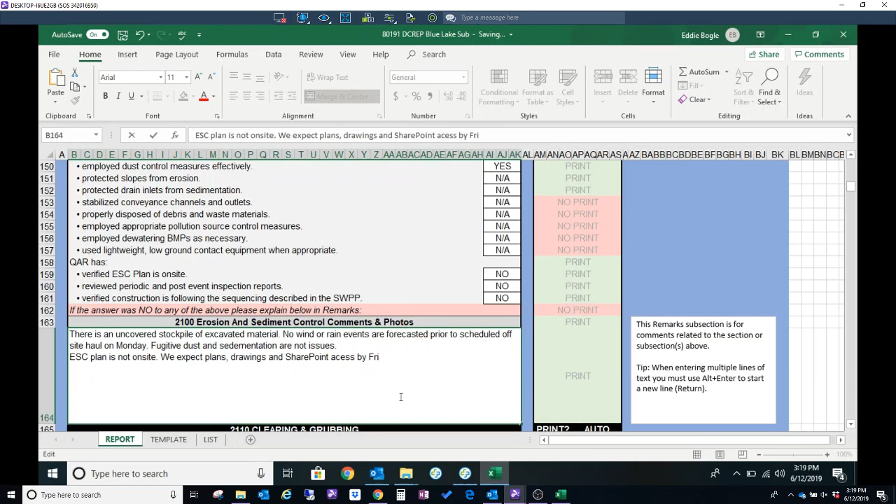Okay, so then clearing and grubbing. They haven't done any clearing and grubbing, right? No. Okay, so we can skip that.

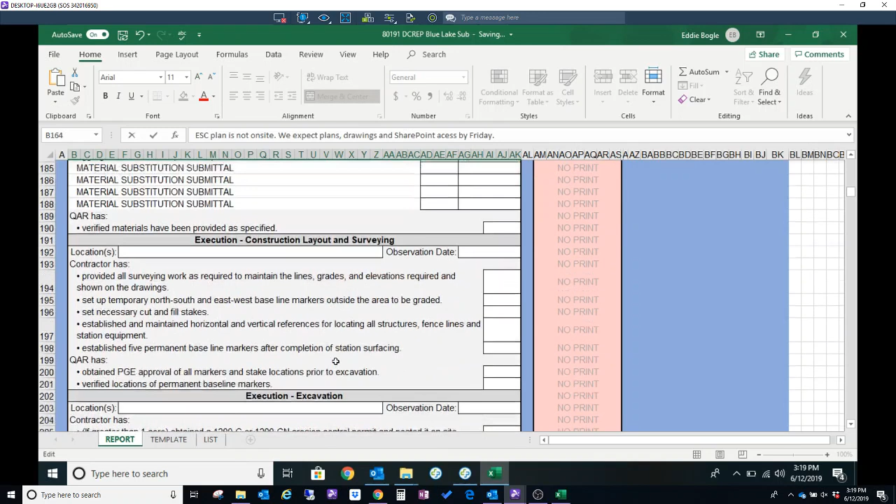So I'm going to go back up here to this top because I want some of my shortcuts here. Let me go view, split, freeze panes.

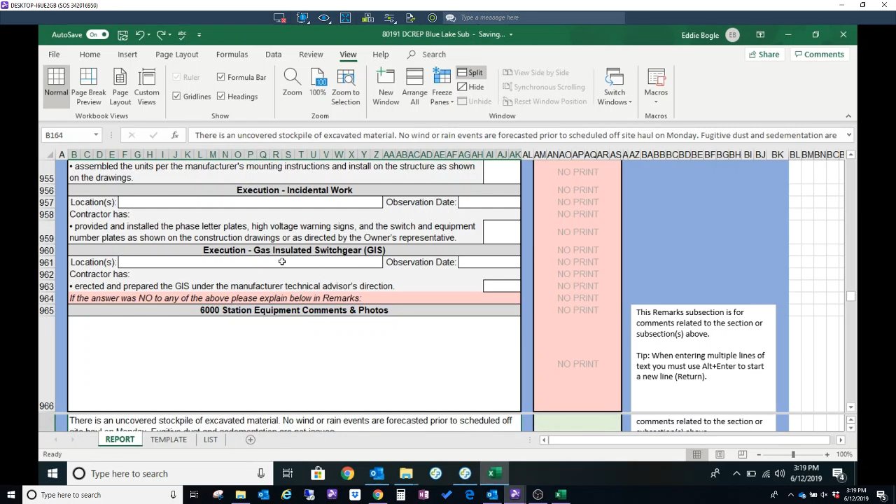No, I'm on. I'm in the way home. Say that again? No, I'm talking to Tice. Oh.

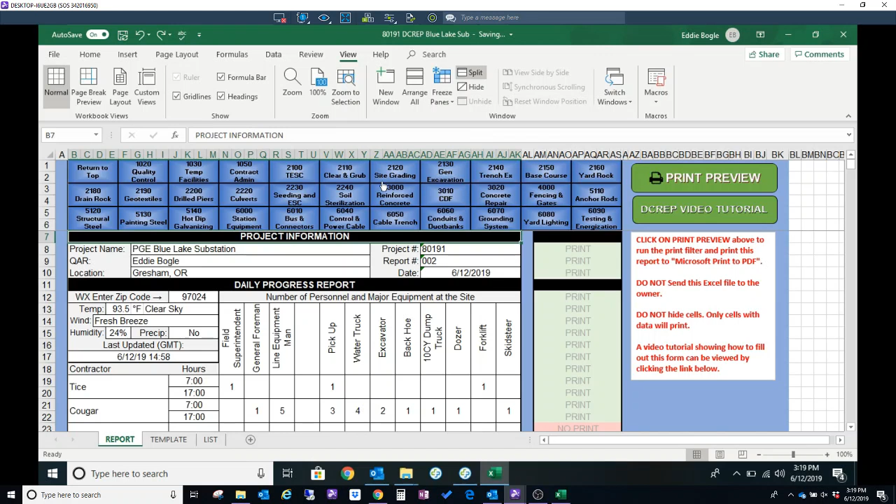So what's our next activity? We got no site grading, we got general excavation, right? Right. Okay.

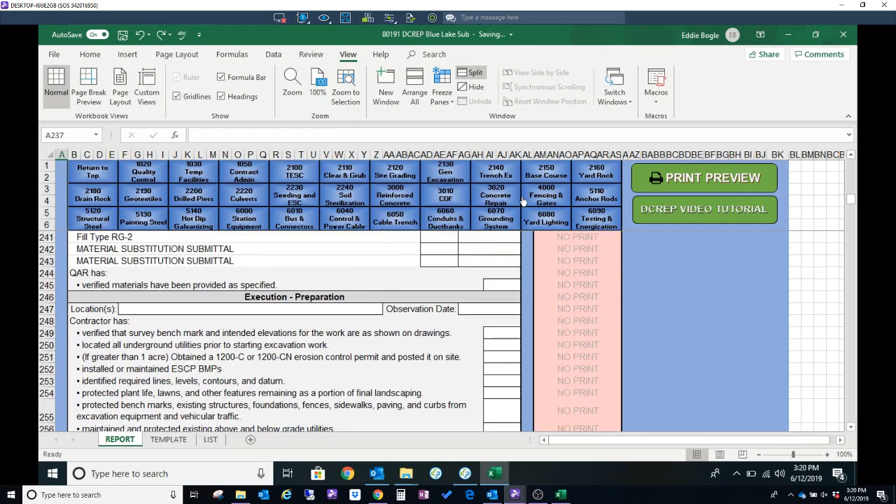I want to make sure there's no excavation for reinforced concrete, that it's not done here. No, so general excavation covers our concrete excavation.

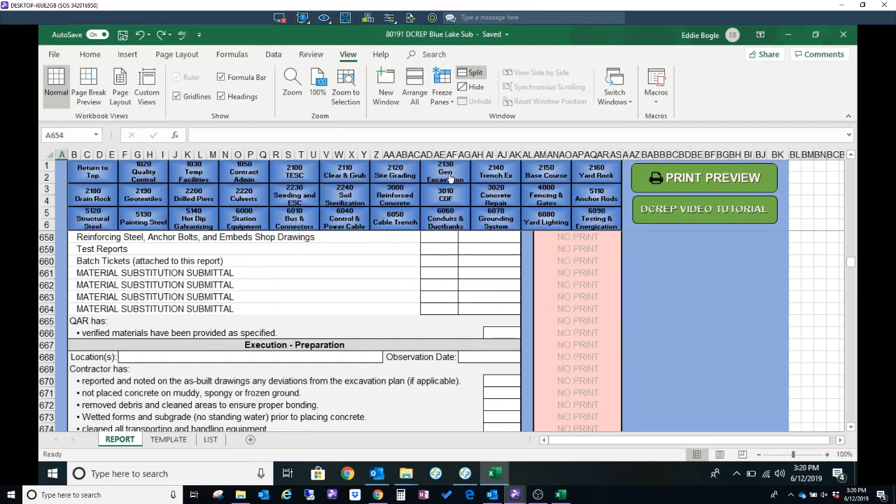So we have not seen any of these submittals. No. Yeah. So we need to put a note in there right away that submittals are not available to the QAR.

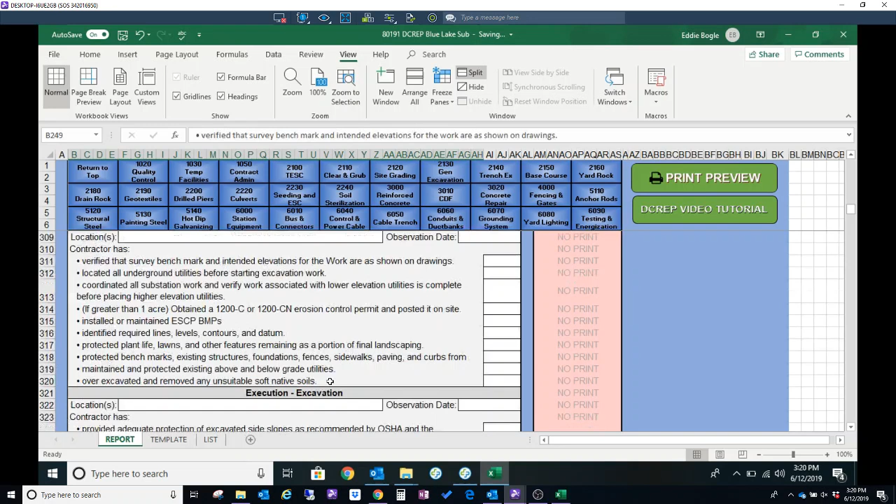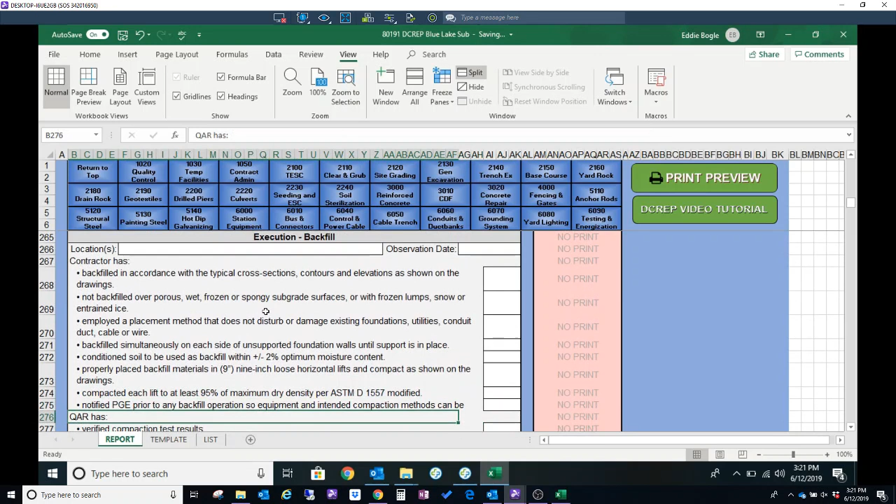Oops. The mouse is really touchy. What's that? I said yeah, mine is on it. Yeah. Go back and slow my mouse down. Well, mine's because I'm trying to control it over the internet, so it's got to send the signal to your computer and then send the response back to me, which is less than optimal.

I'm just trying to get down to the comments section here because there's a lot of stuff in general excavation. Here we go.

So we're going to say QAR has no access to submittals or project documents at this time, so we can't verify anything. I see that I have to retype that because I did it all in caps.

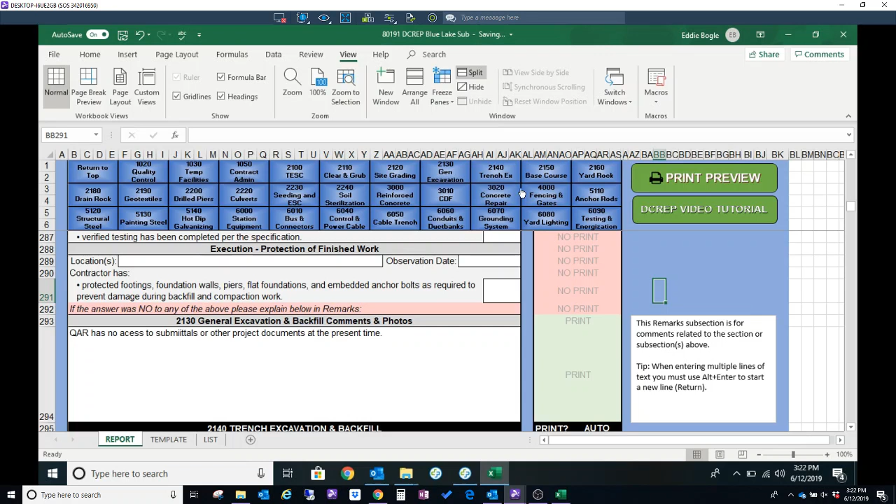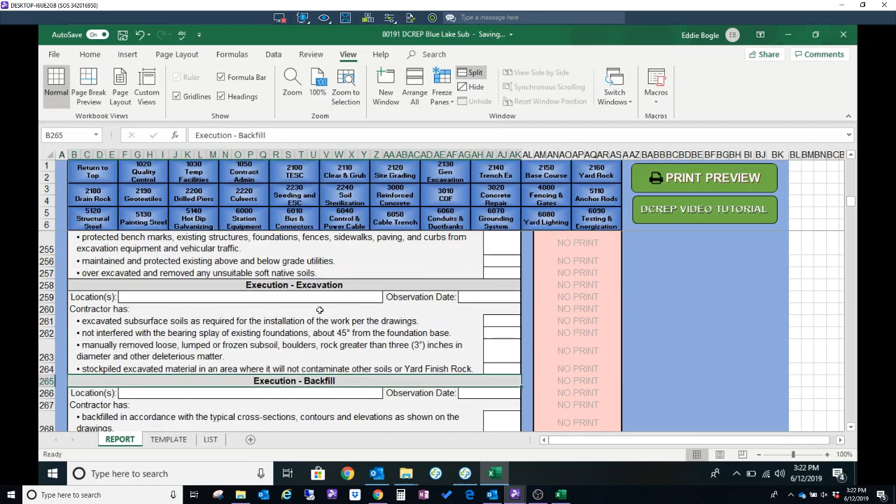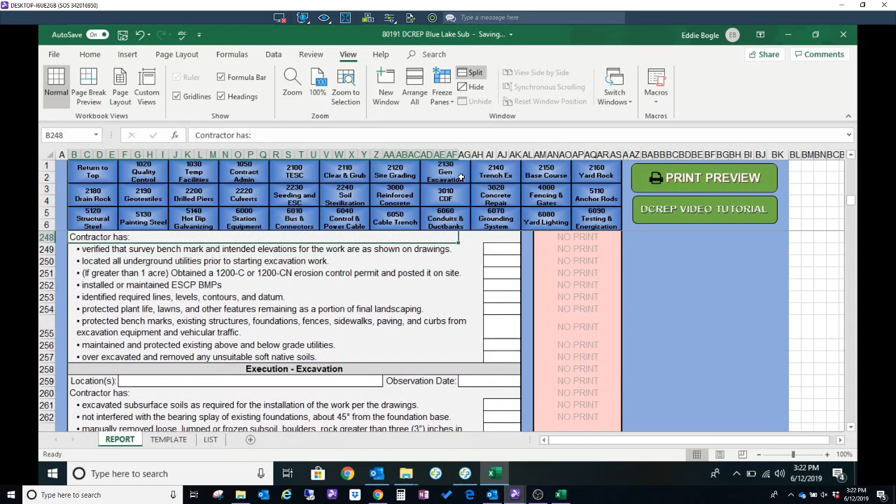Now we'll come back out to so preparation. Blue Lake.

Contractor, so did they verify survey benchmark and intended elevations for work or as shown on the drawings? Yes. And did they do locate underground utilities? They were told that there was none in there.

Okay, have they obtained the 1200C? We don't know. I would put an N/A on that. Well, it's not really not applicable, it's just that we don't know if they have or not. Well, it's a no because it's not posted on site, so no.

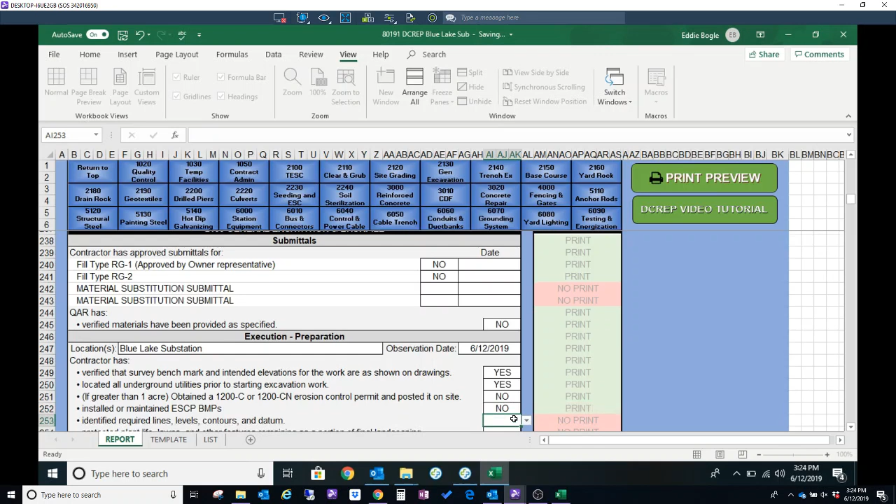Have they installed any BMPs? No. Okay. Have they identified required lines, levels, contours, and datum? Yes.

And these are NAs here. Are they protecting benchmarks, existing structures, etc.? Yes. Maintain and protected above and below grade utilities, yes.

Have they had to over excavate at all? Yes, they have. Okay, so they have removed some unsuitable materials. Yes, that's what they've got, that waste pile.

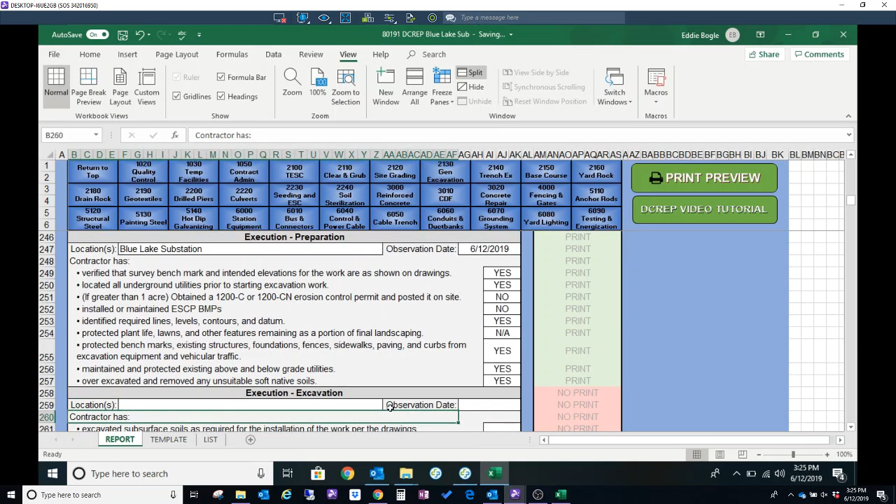Perfect. So now the next section is our execution on the excavation itself. Oops.

And what are they excavating for, dead ends, right? They've got the dead end excavated right now. Okay, but that's what we're reporting on here is dead end foundation excavation, right? Right. Okay, so our location is going to be dead end foundation.

Yeah, because up there on the top is where we got numbers. Yeah, that's the numbers they're going by. Okay, so do you remember what those numbers were? For the dead end, yeah, for the dead ends. Okay, number 11. Number 12. Number 17 and 18.

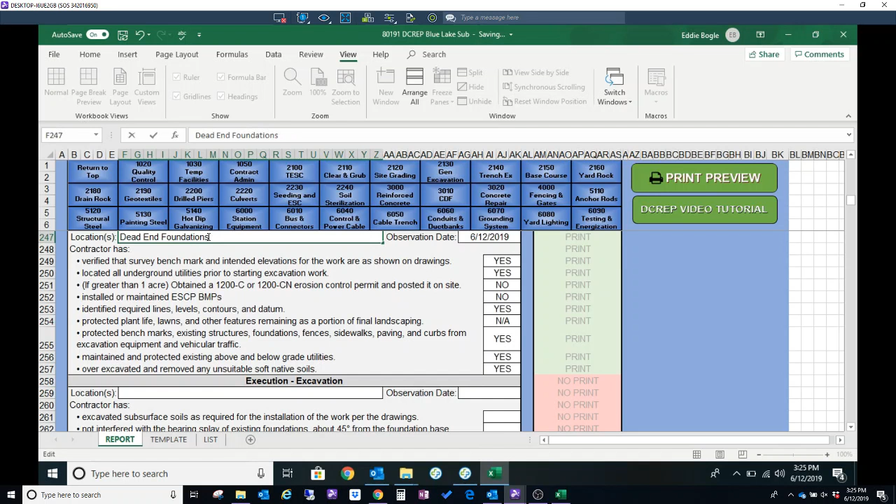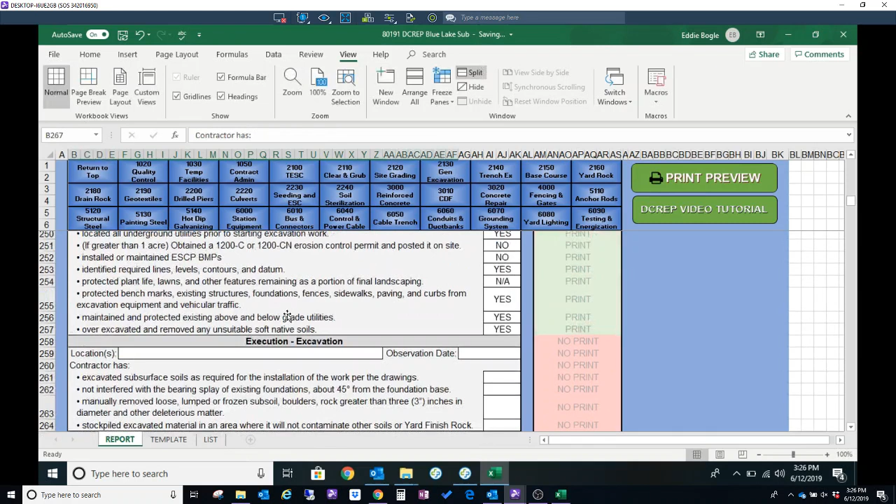There we go. Perfect. And why did it do that? So now we can just copy this coming down.

So subsurface soils, required for installation, so they've over excavated the way they're supposed to. Yes, they are. Not interfered, they haven't dug up next to any foundations.

No. Okay, oh, they have not interfered. Yes, yes, they have not interfered. There's double negatives in here, so no is always bad. Yes is always good, is the way I tried to write these.

Okay, manually remove loose, lump, frozen boulders, rocks greater than 3 inches. Nope, not applicable, we just haven't encountered that. Yes, stockpiled excavated material in an area where, yes, they have done that. Okay.

Really dig a hole in front of my truck.

So have they done any backfill yet? No. Okay, so this doesn't apply yet then. So we don't need to do any of the backfill stuff here. We just leave that blank.

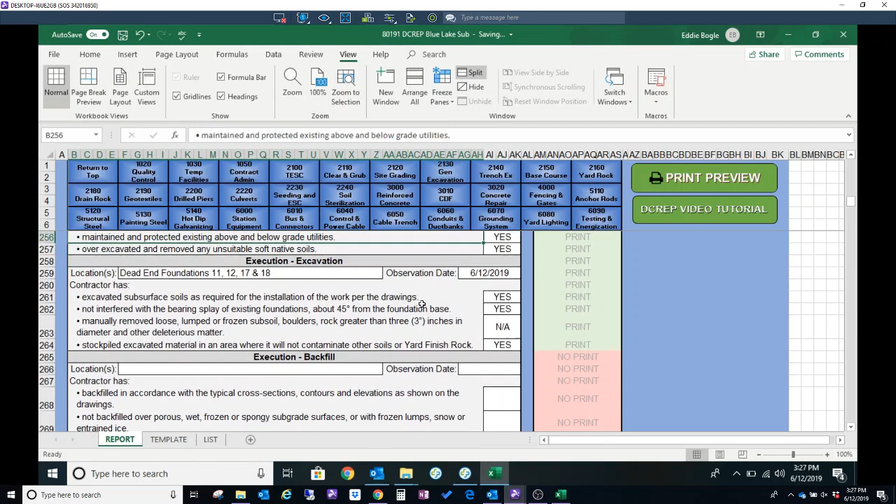And then I want to show you something here too. So if you don't want a section to print, but you want to keep the information in there, like on excavation, you can come up here and there's this print auto setting, just change it to no. And now this whole section will not print. Even though there's stuff in there, it won't print. So you can manually change that so it won't show up.

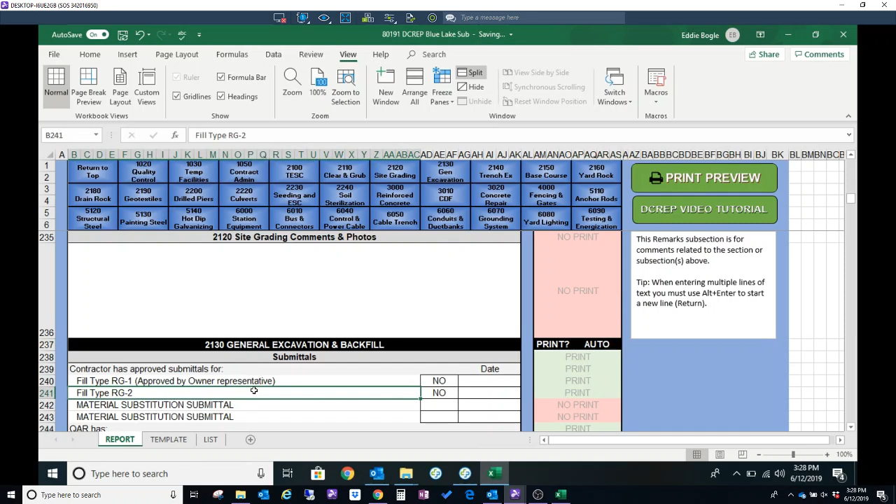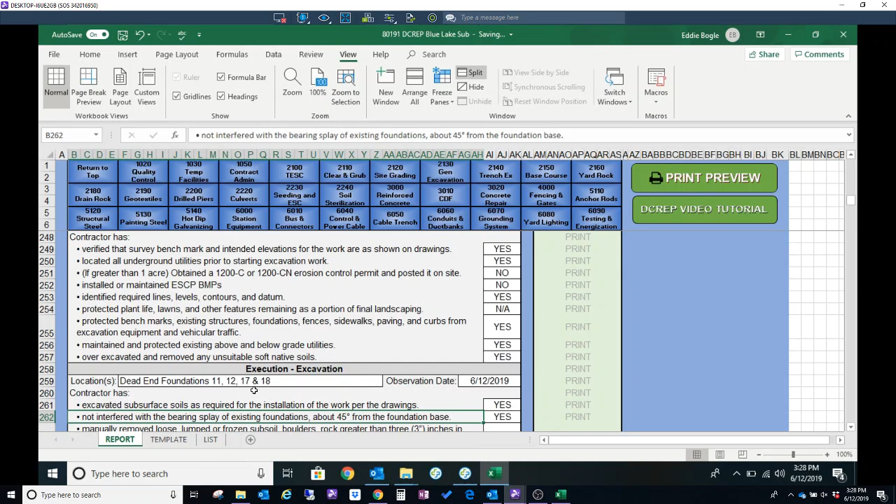And that way you don't have to go and erase stuff that you might want to have in there for the next day. Okay, so the idea is you just go in here daily and update each of these sections. When you change that observation date, you just change that stuff for that day. And you kind of move through a substation in a linear way, you know what I mean? So that way you can just kind of keep using these sections of the reports and updating it daily, changing that observation date.

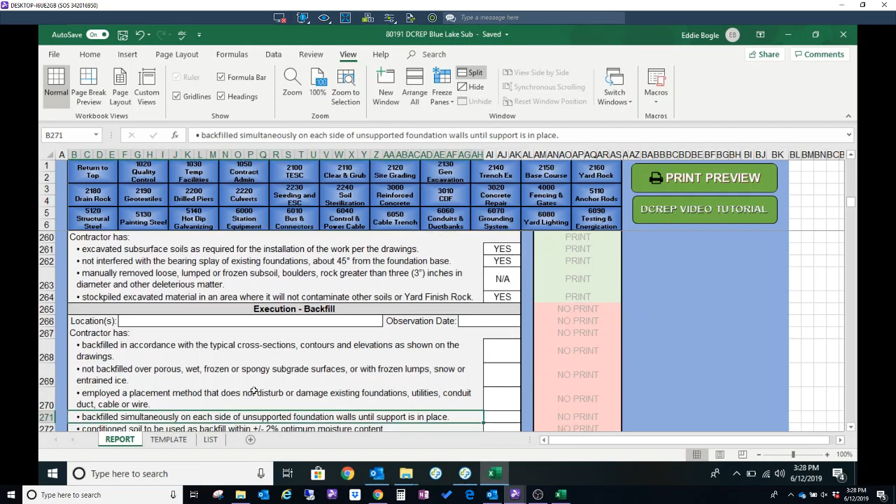So no backfill, we're done with that. Execution tolerances, that's after compaction. Field quality control, we don't have any testing yet, right? That's right. And no protection of finished work.

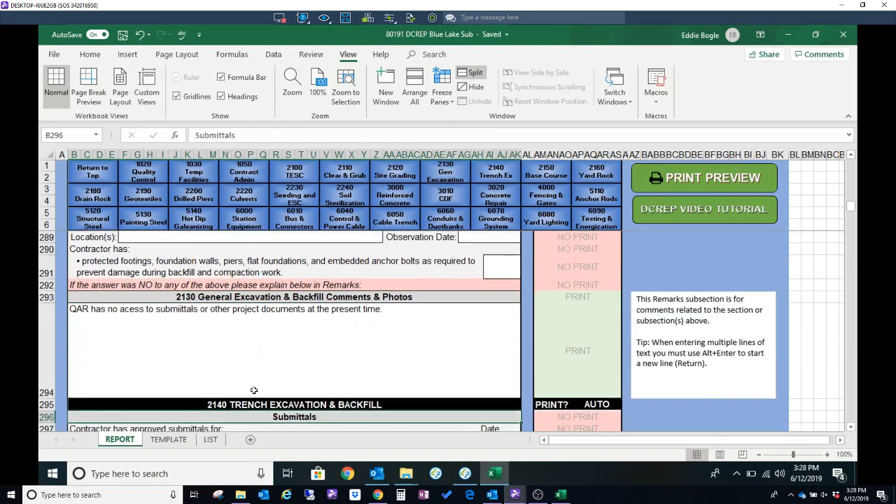Let's see, protection. So are they doing anything to protect footings, foundation walls, stuff? Are they protecting the stuff they're working around? The only thing they're putting up is flags. They're putting up flags? That's all they got. Okay.

They're marking all the holes. So we're going to say yes, they're installing visual barriers. Right. Yes, installed.

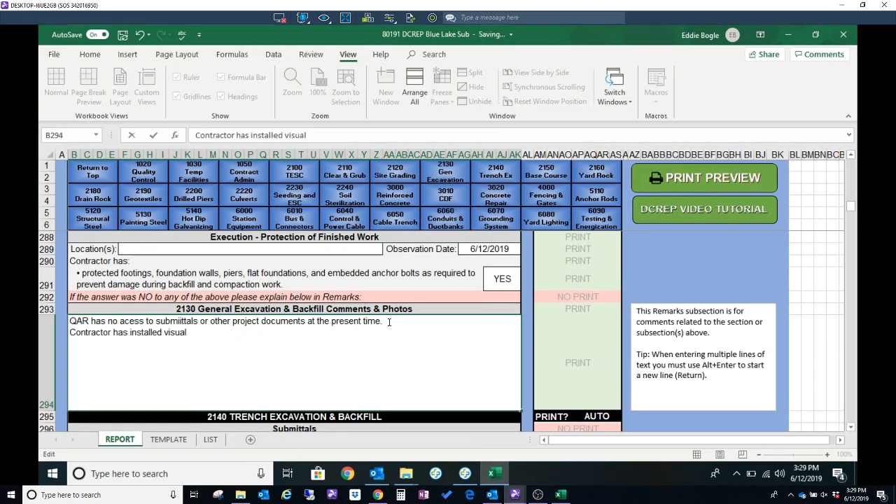Are they using a spotter when they're digging next to foundations and structures? Yes, they did. And is using a spotter when excavating and transiting in the yard.

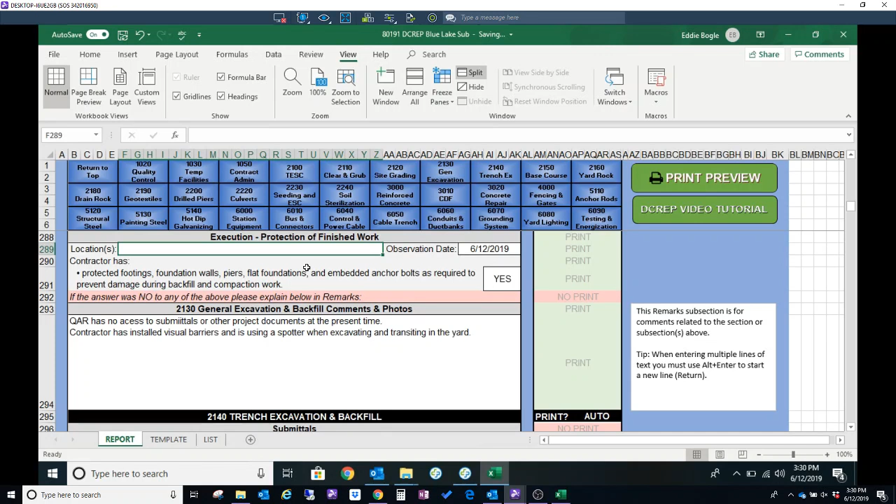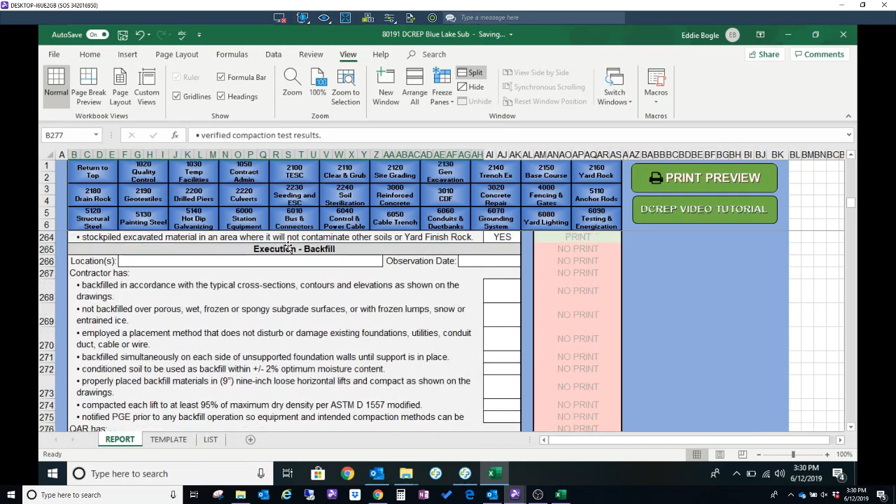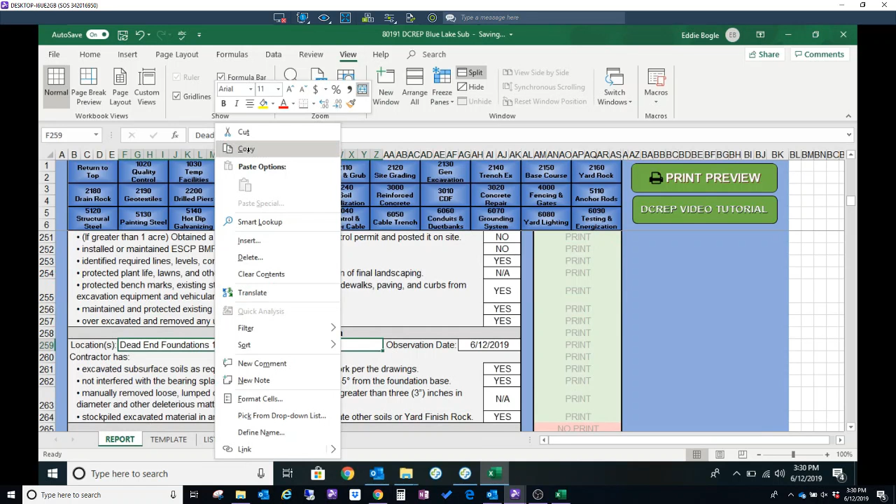All right. And this was, what were these excavation locations here? Come on, there we go. Sorry, it slows it down a lot when I gotta wait for stuff here. Copy.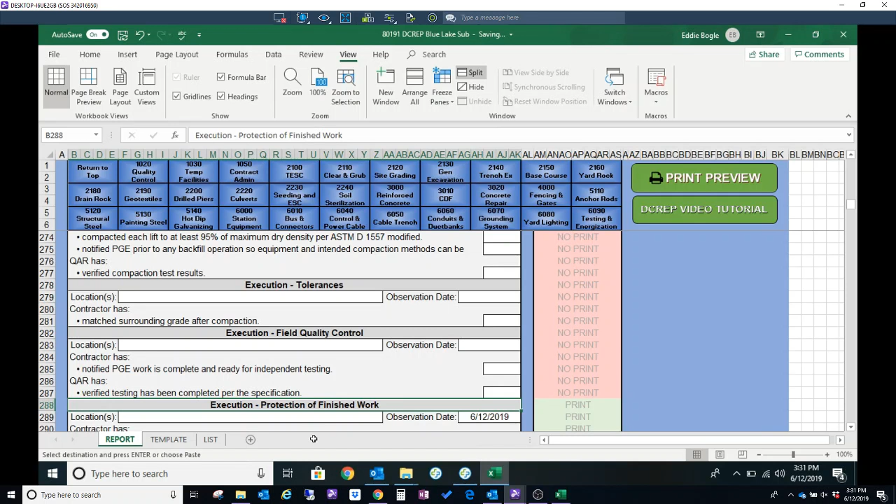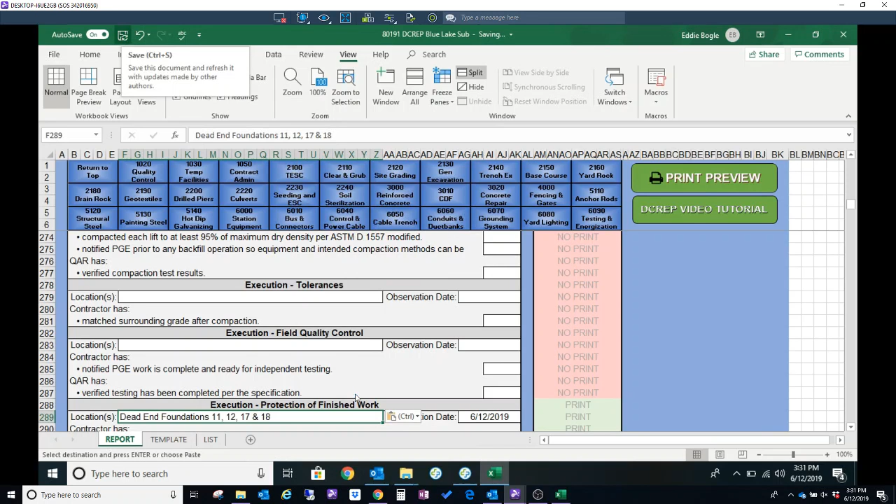All right, so now we can go to the next section that we had. So we had general excavation. They haven't done any trench excavation, base course, drain rock, geotextile.

Are they building forms? Yes, they are. Okay, drilled piers or all spread footers? Spread footers. Okay, so we'll go to reinforced concrete, go to that section next.

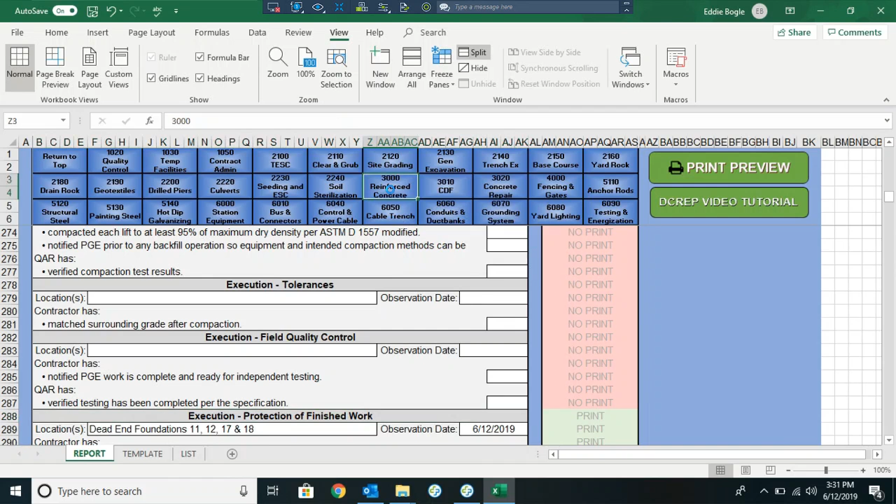And this is going to be the same locations, right? Just for the dead ends? Yes. Okay.

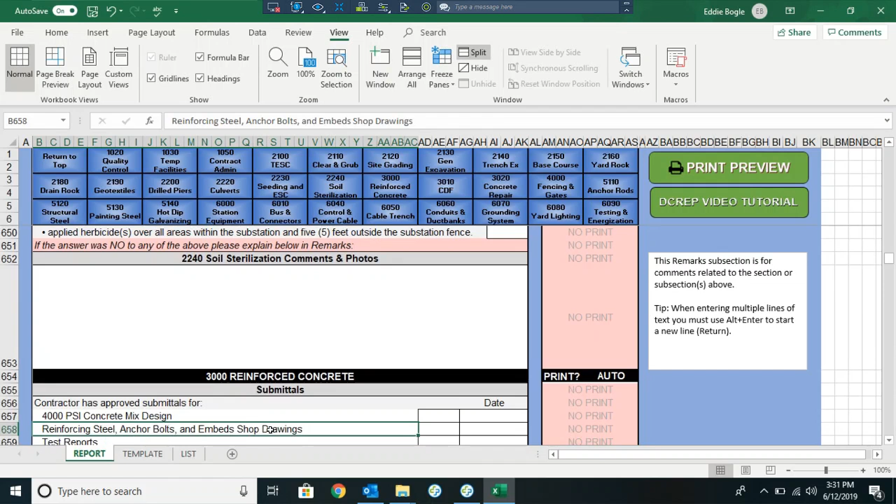Dead end foundations, remind me what those numbers were. 11, 12, 17, and 18, was that it? Yes.

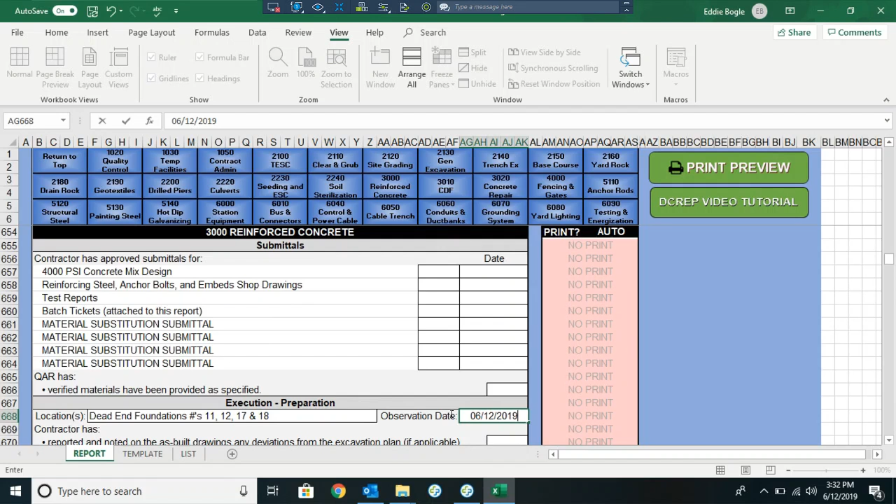Okay, so have they reported or noted, have they been keeping as-built? Yes, they have. Okay, so as long as they're updating as-built, not placing concrete on muddy, spongy, or frozen ground, that hasn't happened yet, so... Oh, NA. NA, yep, yeah, blah blah blah.

Remove debris, wetted forms, cleaned and transported. So they're just building forms right now. Are they installing forms at all, or just building? They are, yeah. All the numbers that I gave you, that's where they got forms, except for in the dead end. Okay.

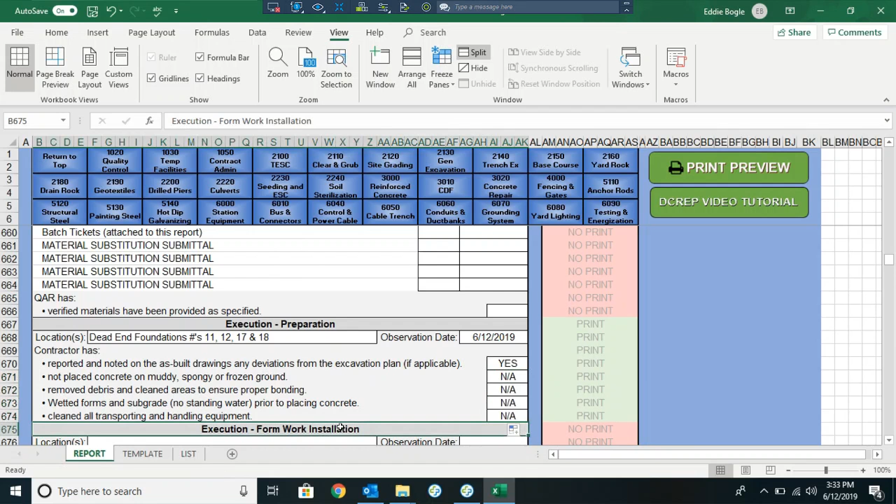So we'll go here. So there's no earth sides. It's that everything has reinforced formwork in it, all properly constructed, properly built.

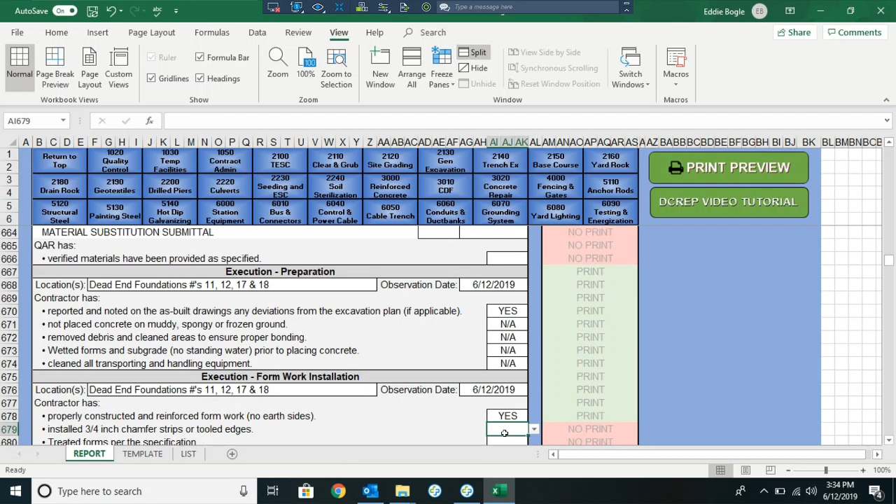Do they have chamfer strips on their forms? And they probably haven't treated the forms yet because they're not ready to pour. No, they've already oiled them down. They're getting ready to pour next Wednesday, Thursday. Do they have rebar in too then? So rebar, the rod busters are coming Monday, Tuesday. All right, so we're good there with this section.

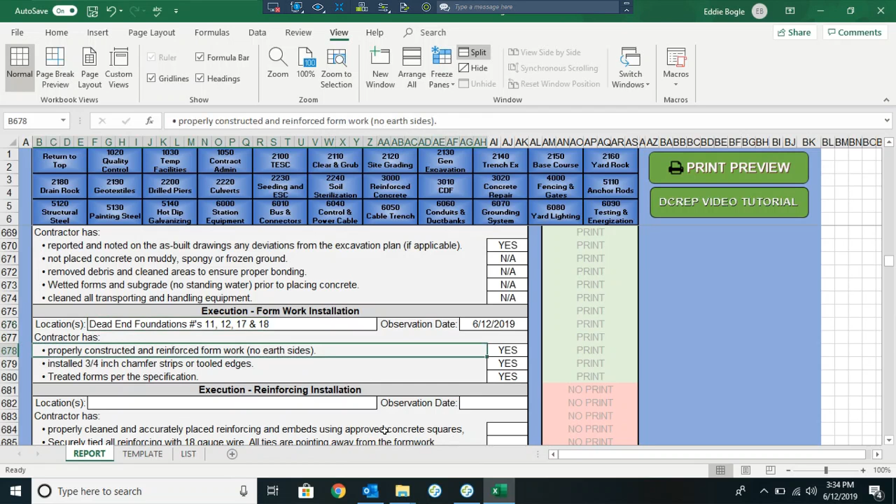I don't think we have anything else to put in. So that's it for this report. We don't have any steel, drilled piers, culverts, CDF, or any of these things up here, fencing and gates.

Okay, so now to print this report, we hit the print preview button. I see that's an issue. Let me do page setup. We're going to fix this by getting rid of this. Backspace. Okay, that looks better. So now we've got a 5-page report.

Let's see, previewing it. This all looks good. Looks good. Beauty.

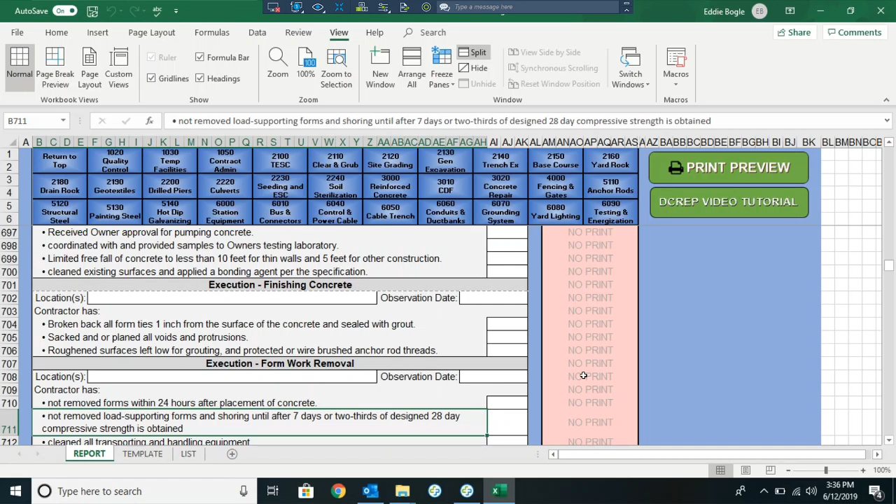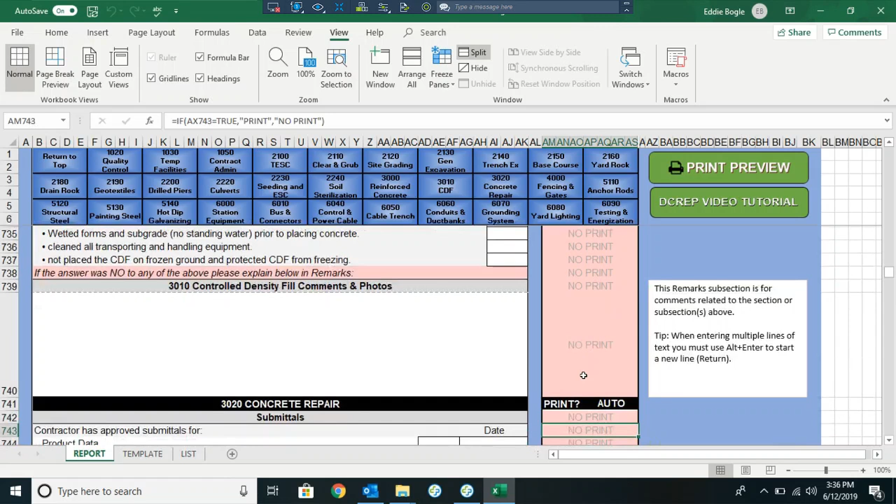And then we've got to spell check this one again. I've got to go back and spell check the template. Kind of glad we went through this together because it shows me a couple things I got to fix.

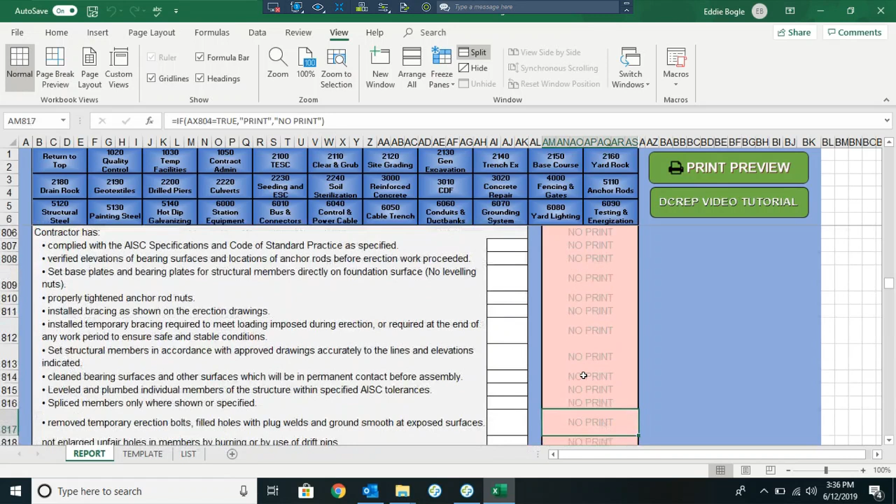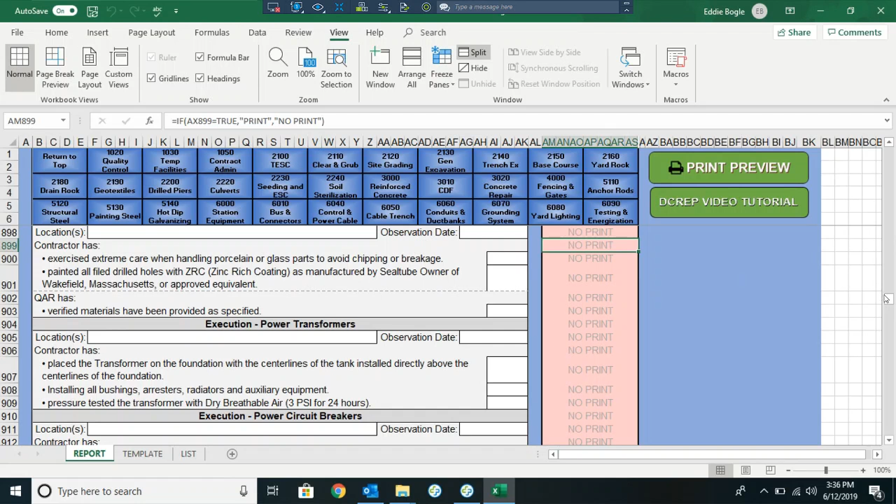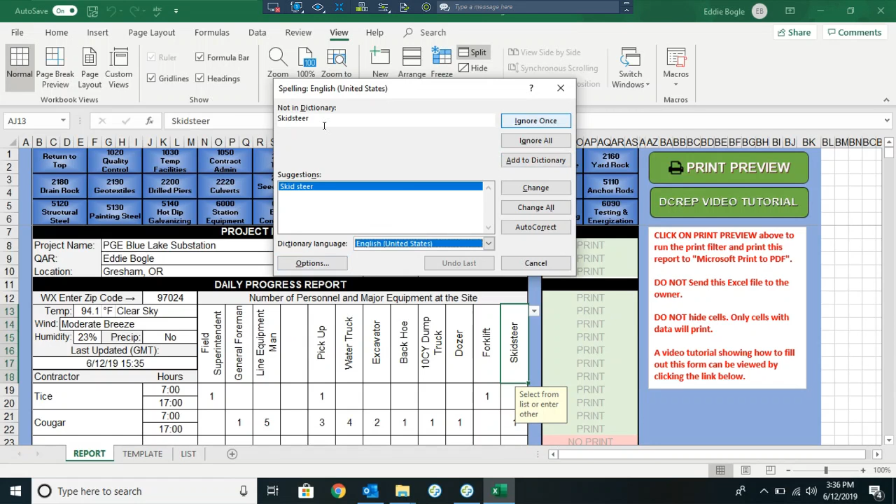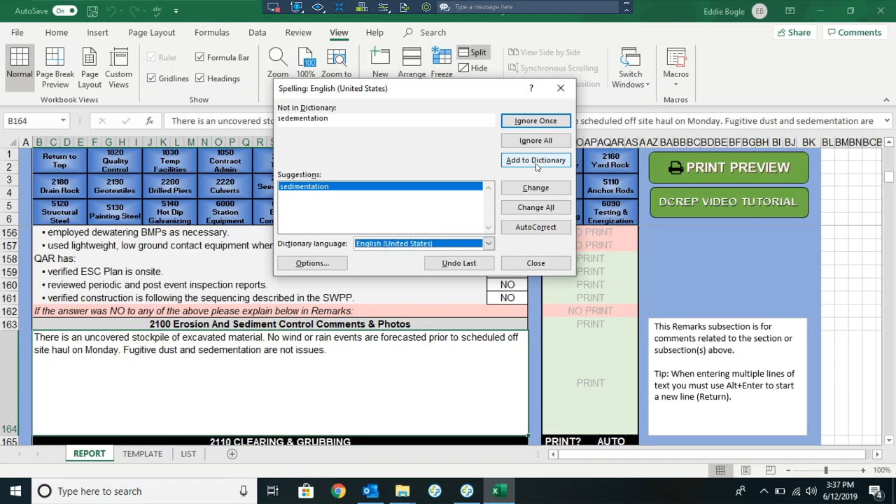Oh, actually, I'll do it when I spell check it, it'll find that for me. All right, so we're gonna go back to the top, start from the top. We're gonna hit F7, spell check this thing. Skid steer. Add to the dictionary. That's the name, yep, I'm gonna add that to the dictionary. Add that. Add that. Add that. Go.

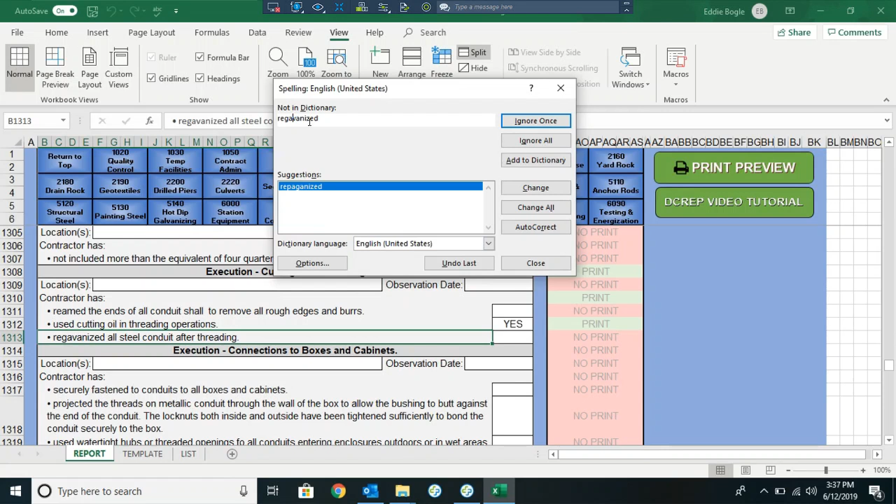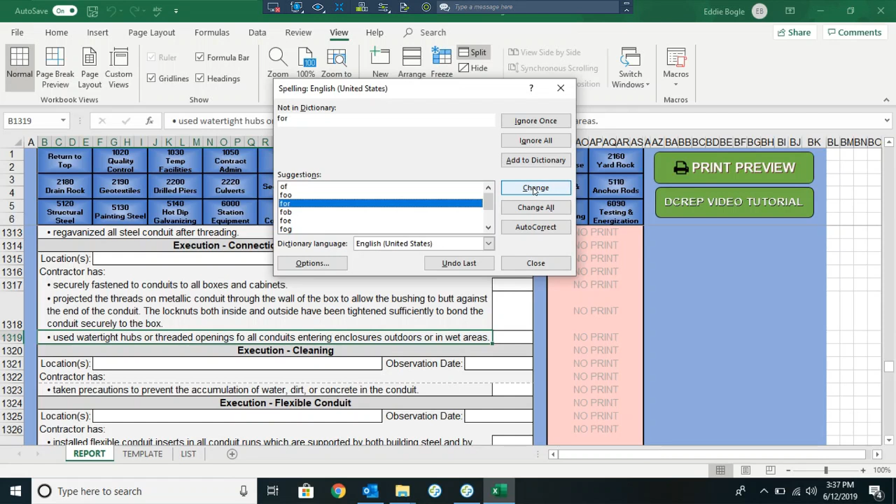Regalvanized, and we're gonna add that. That's gonna be for. Change that. Change. Utilities, change.

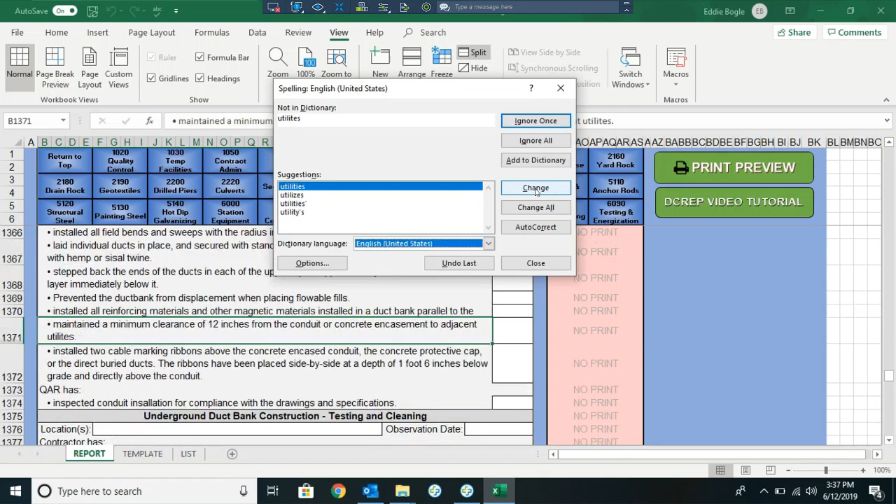What's funny is these are all, I copied all this stuff. Here's the one that we need to get rid of. I copied all this stuff right from their spec, so these are misspellings in their specification, I do believe.

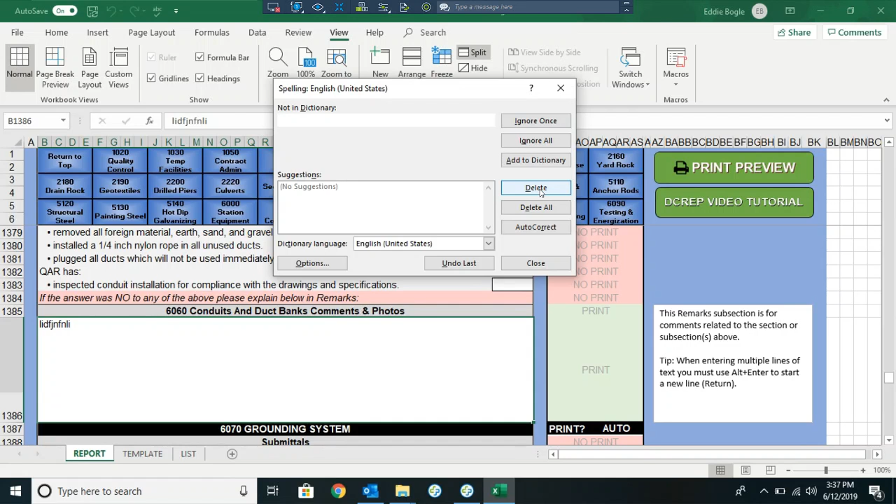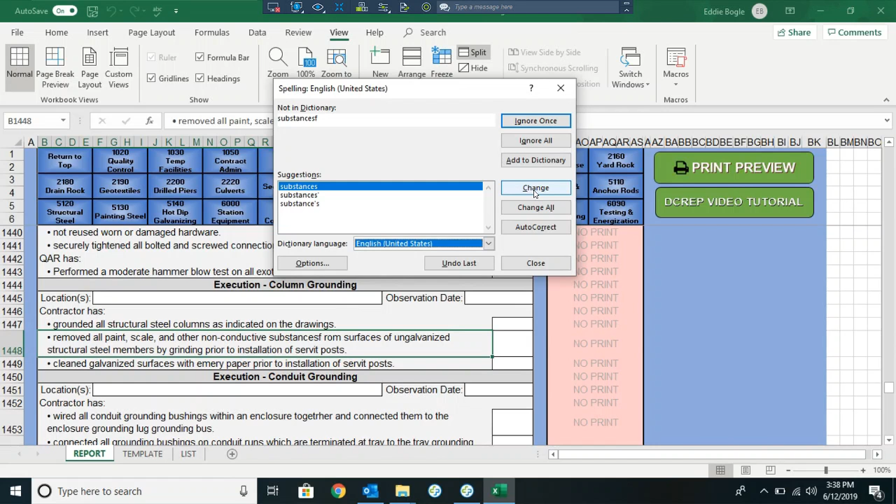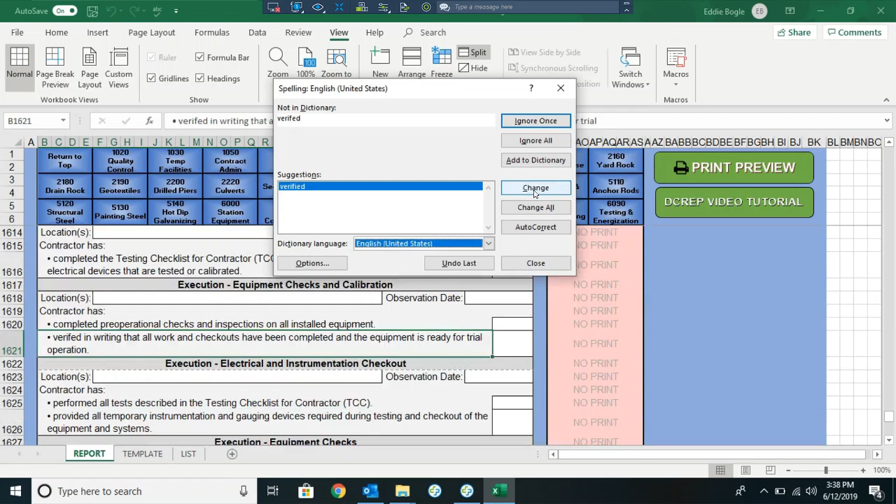Repeat word, delete. Substances, change. From, change. Execution. Verified. Keep it as is.

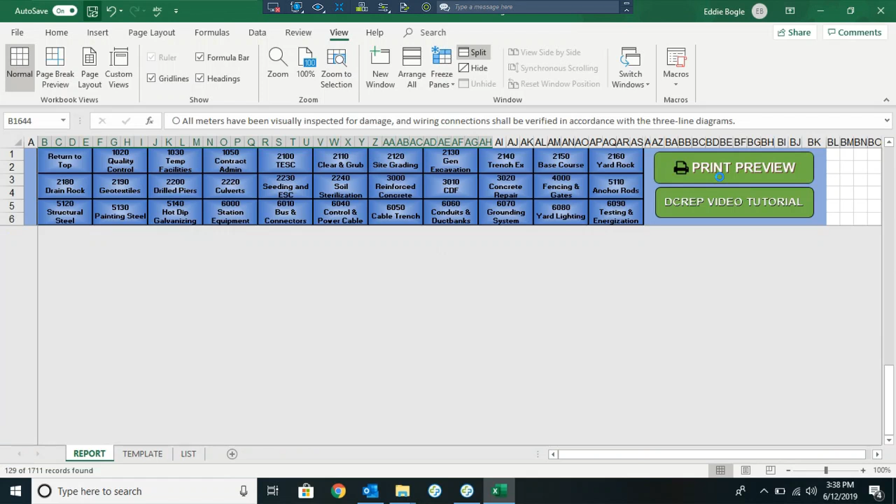Hey, we're all spelled right now. Fantastic. So now let's hit, I'm going to save this again. Hit print preview. And 4 pages. That looks pretty darn good.

So we'll print, and so now when we print this, it's going to be Microsoft Print to PDF. And we're going to print it to here. And instead, all we got to do is change example to today's date, which is 2019-06-12. Save. Perfect. Now we can close this.

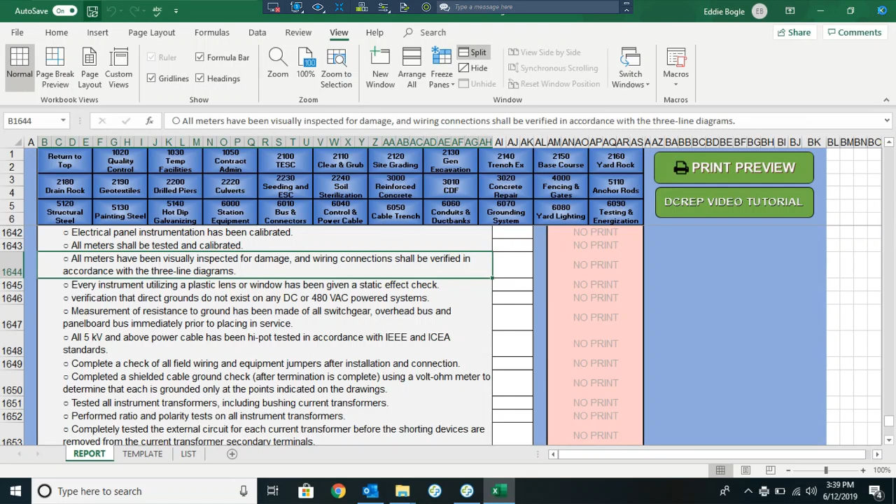And the document we just printed to PDF is the one that we'll send to PGE. And like I say, the way we'll send it is we'll just upload it to their SharePoint site as soon as that's available. Get rid of this guy here. Delete. Yeah, so we should be good to go now, Eddie.

So the other thing, I think maybe tomorrow it'll only take 5 minutes of your time. Well, tomorrow we'll just do it together again, but this time you'll do it. So one of the things I need to add in here that we need to have is the daily safety meetings. We need a picture of their tailboard, a PDF or a photograph of their tailboard put in here every day.

So every day you need to sign their tailboard. You should be a part of the tailboard meeting if you're there. You need to sign their tailboard and take a picture of it and enter it into our construction log here. And if you can, if your phone will do it as a PDF, we want to scan it as a PDF, not as a JPEG photo. Okay, do you know how to do that?

Yeah, I can take a picture of it. Okay, but the picture, we want it to be a PDF file, not a JPEG, not just a picture. Do you know how to do that? Do you know what the difference is? I've done it in the past, yeah. Okay, perfect. All right, well, sounds good, bud. I'll talk to you tomorrow. Okay, we got a meeting on site.